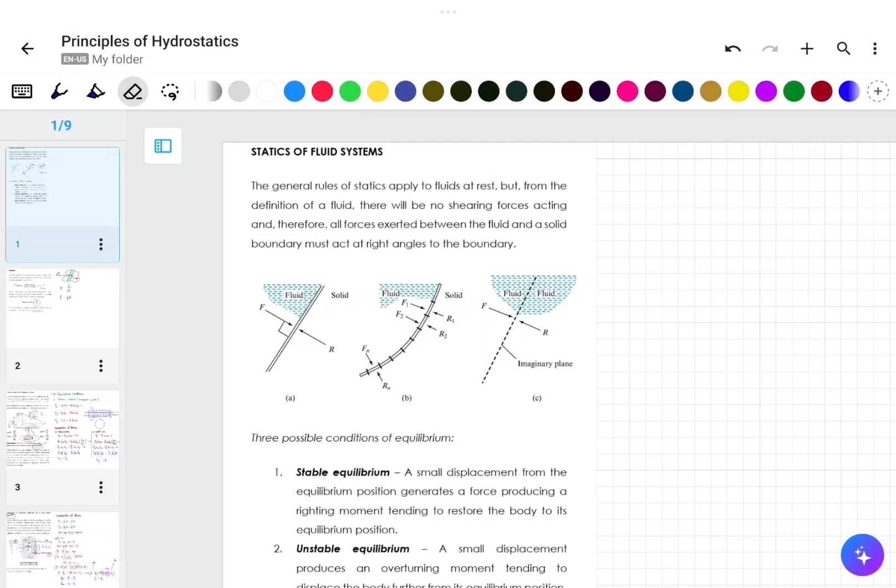So for today, we're going to discuss the statics of fluid systems under principles of hydrostatics. The general rule of statics applies to fluid at rest, but by definition, fluid is a substance that continues to deform under the action of shearing forces. In this case, there will be no shearing forces acting, and therefore all forces exerted between the fluid and solid boundary must act at right angles to the boundary. Why is that? Because we want to have a body which is at rest.

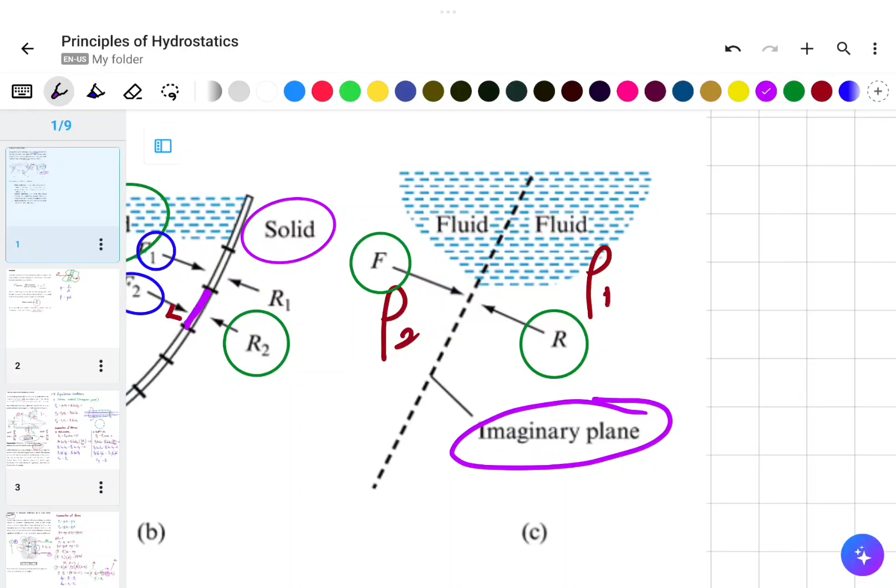Okay, so we will continue our discussion.

So now let's proceed with three possible conditions of equilibrium. A while ago, we discussed the possible scenarios for forces. Now let's discuss these possible conditions of equilibrium.

First, we have what we call stable equilibrium. A small displacement from the equilibrium position generates a force producing a righting moment tending to restore the body to its equilibrium position. So it's like this.

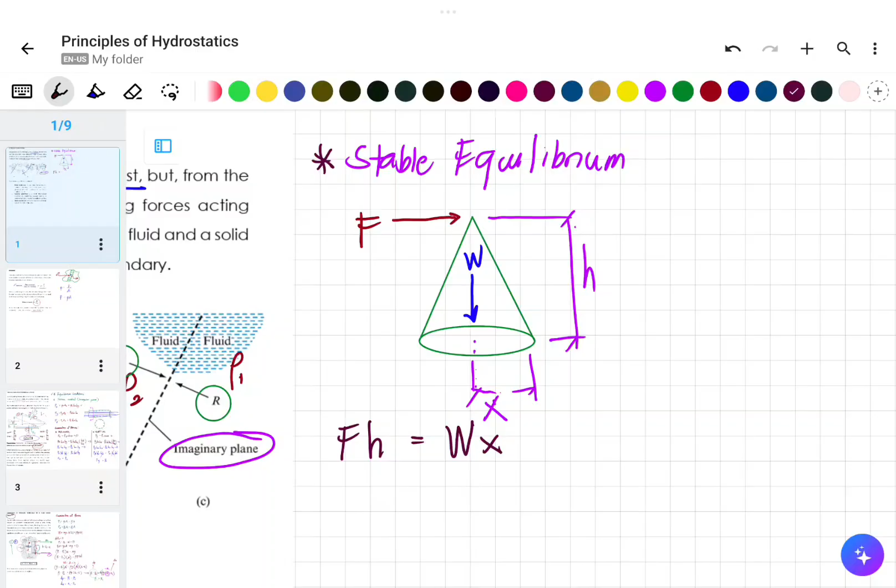Next, let's have what we call unstable equilibrium. A small displacement produces an overturning moment tending to displace the body further from its equilibrium position. So let's have that.

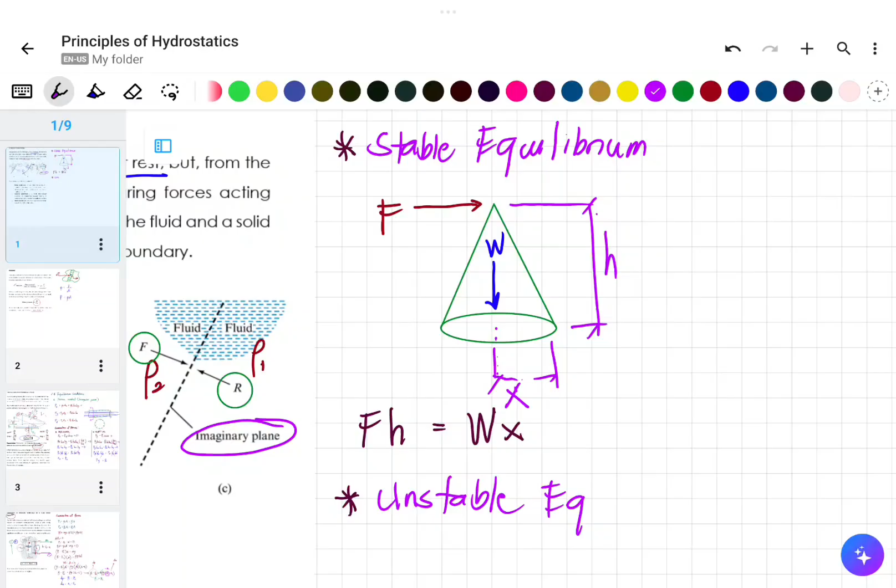For example, this is your cone. And then, of course, there's a force that will act on the body. There's still a weight. And then, same, we have our distance, x, and then height, h.

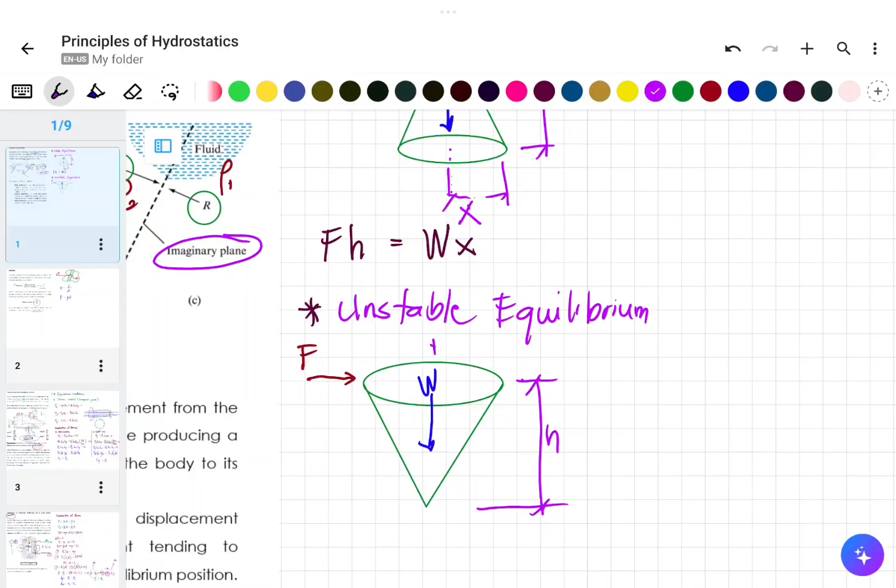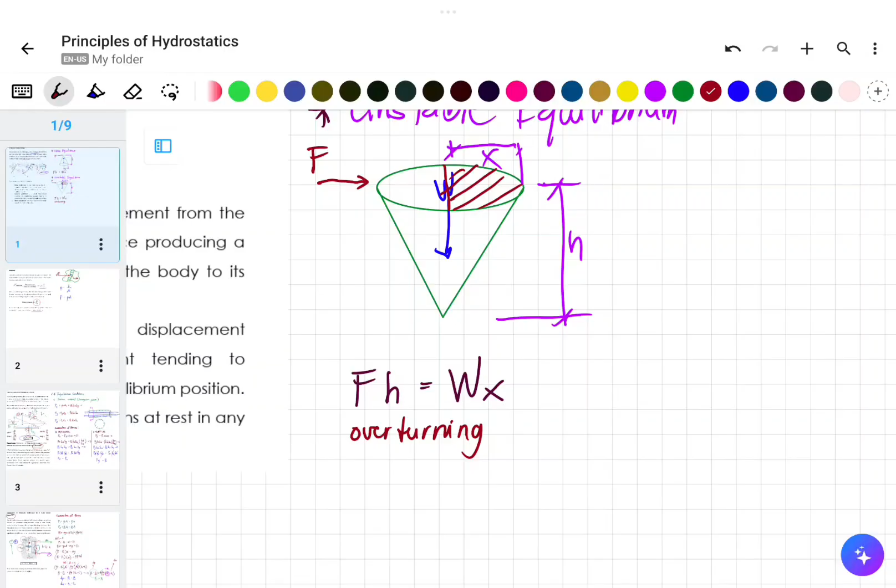As noted there, the displaced body tends to displace further from its equilibrium position, it won't go back. And then our last topic, our so-called neutral equilibrium.

So, neutral equilibrium. Let's say this is our cone again, but this time it's lying down. For example, like that. For example, this is our cone.

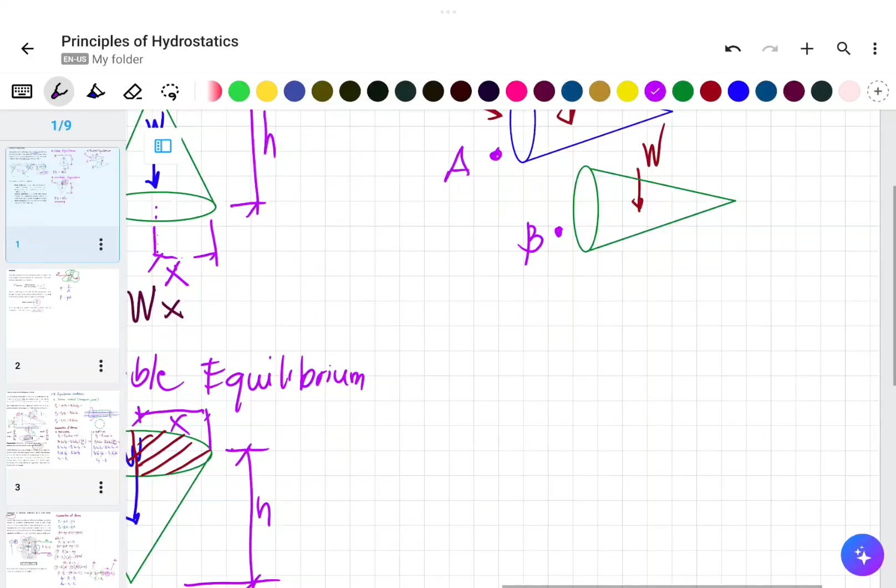That's why it's neutral. The body remains at rest in any position to which it is displaced. It's only displaced, so we have a displaced position. So this is our displaced position of the body.

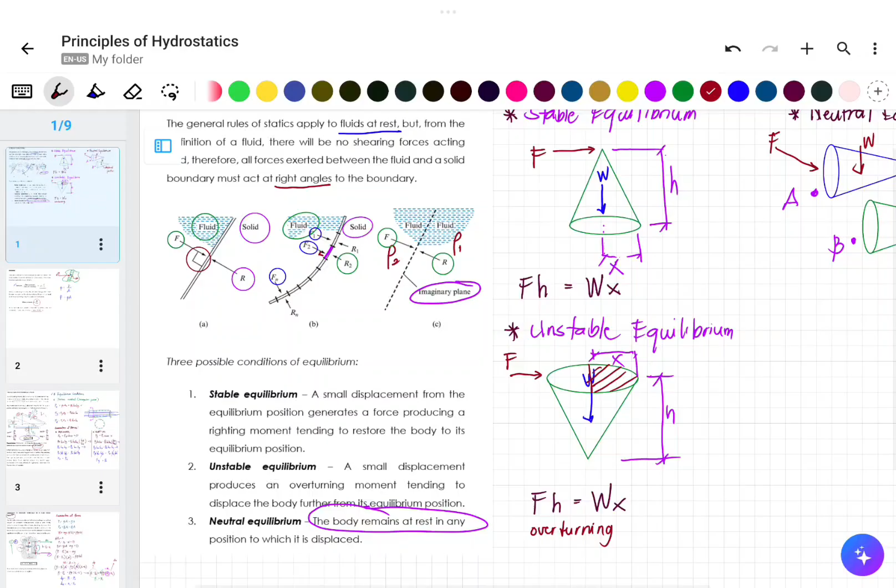Okay, so that is the three conditions or possible conditions of equilibrium, in relation to our static forces or pertaining to fluids at rest. That's why we're discussing equilibrium. Okay, so that's the three possible conditions.

First, stable equilibrium: a small displacement from the equilibrium position generates a force producing a righting moment tending to restore the body to its equilibrium position. Second, unstable equilibrium: a small displacement produces an overturning moment tending to displace the body further from its equilibrium position.

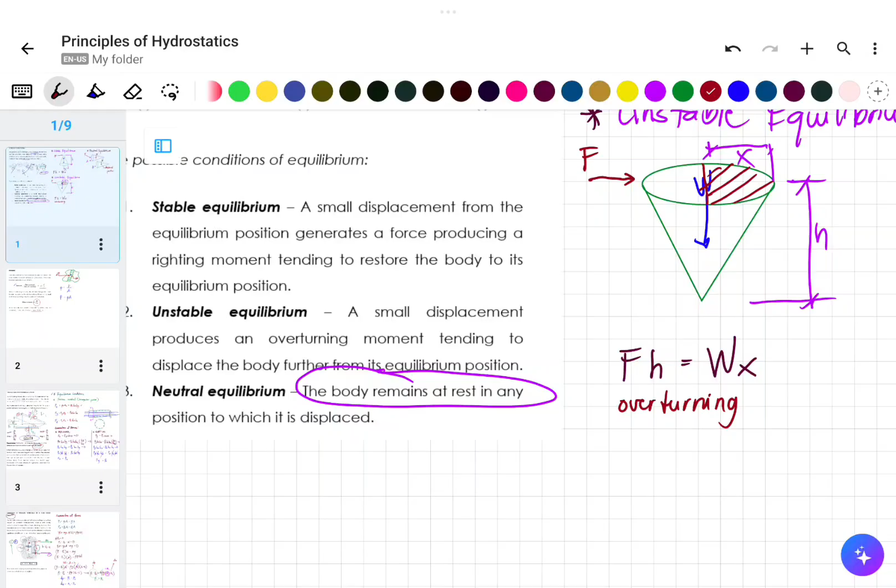That's right, like this, it will really topple over. And neutral equilibrium is when the body remains at rest in any position to which it is displaced. Okay, so that's our three possible conditions.

So now let's talk about pressure. Pressure is defined as the force exerted per unit area. If the force exerted on each unit area of a boundary is the same, the pressure is said to be uniform, similar to earlier. So if that's uniform, or the same, our pressure is uniform.

So in this case, this is our equation: P is equal to F over A. Therefore, it follows that if we want to compute for the force, that is pressure times area. So that is for our calculation.

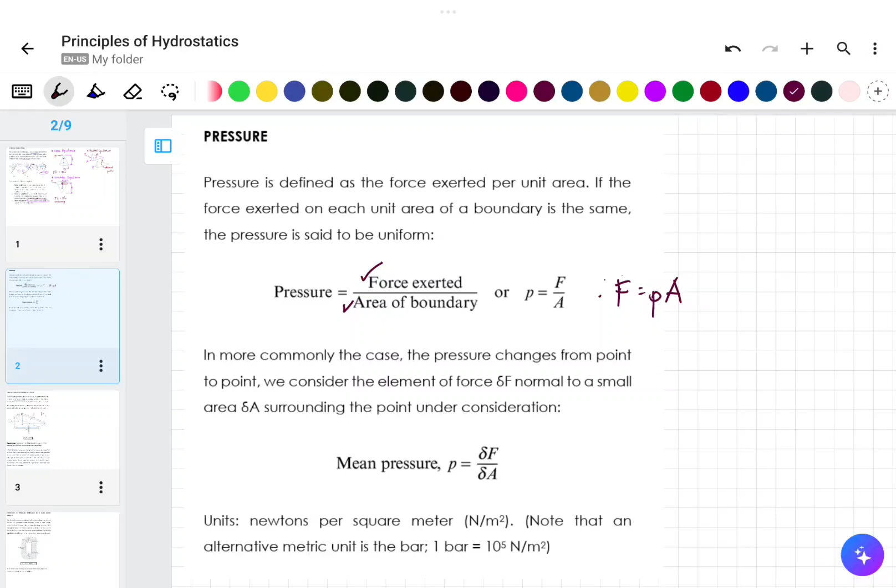In more common cases, the pressure changes from point to point. We consider the element force delta F normal to a small area delta A surrounding the point under consideration. So this is where mean pressure, the average, comes in. For mean pressure, let's say this is the body we're considering.

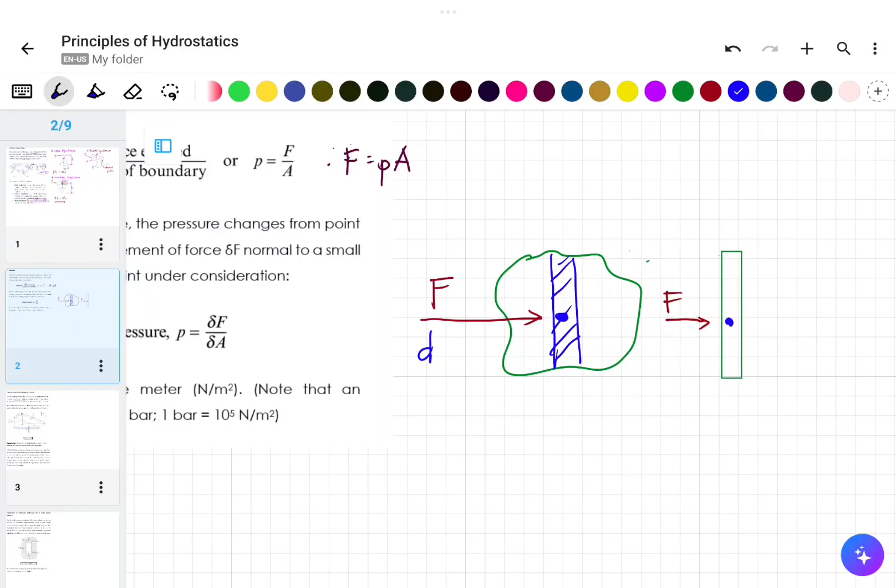So units for pressure is Newton per square meter, it can also be pounds per square foot, or the more commonly used one is bar when the value of pressure gets high, which is 100,000 Pascal. 1 bar is 10 raised to 5 Newton per square meter. Okay, so that's for the value of pressure.

Now let's talk about Pascal's law for pressure at a point, by considering the equilibrium of a small fluid element in the form of a triangular prism, as shown in the illustration. This triangular prism surrounds a point in the fluid, and a relationship can be established between the pressure P sub x in the x direction, P sub y in the y direction, and P sub s normal to any plane inclined at angle theta to the horizontal, at this point in the z direction.

So the relationship that can be formed is this: P sub s equals P sub x equals P sub y. That is what we call Pascal's law. Pascal's law indicates that the pressure at a point is the same in all directions and applies to fluid at rest.

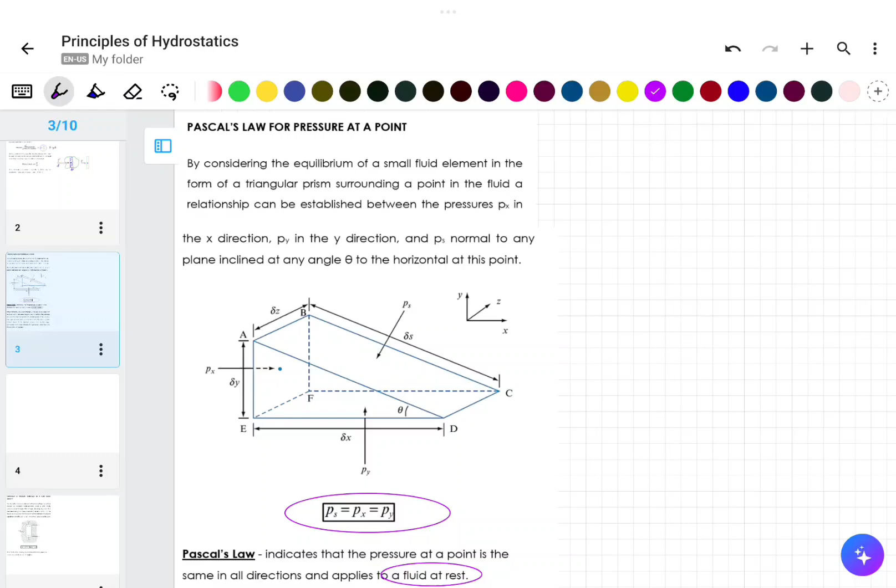Take note, fluid at rest - that's what we're discussing. So for us to understand how these three pressures are equal, let's consider this triangular prism. First, what condition must be satisfied? It should be fluid at rest, or equilibrium.

So we have this equilibrium condition. When we say equilibrium, our forces should sum up to zero. So when we sum the forces, it equals zero, regardless of direction.

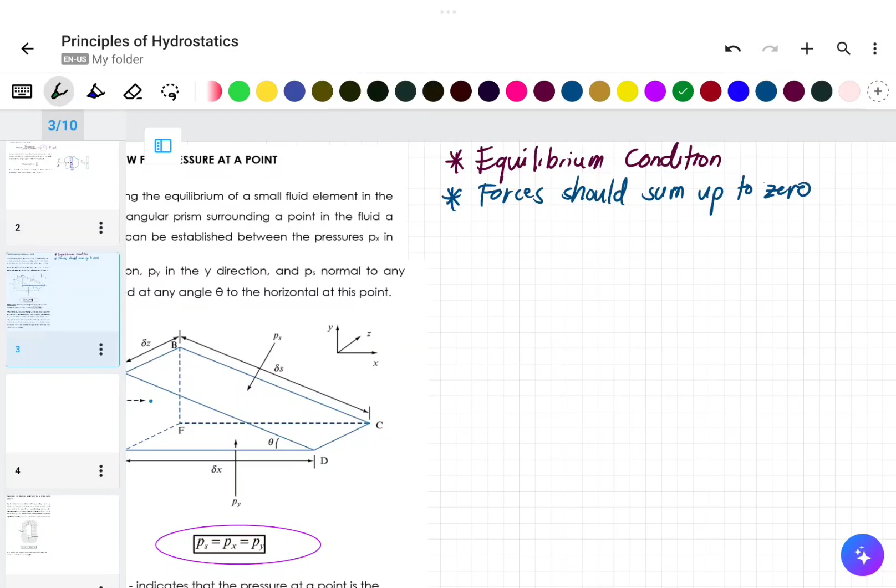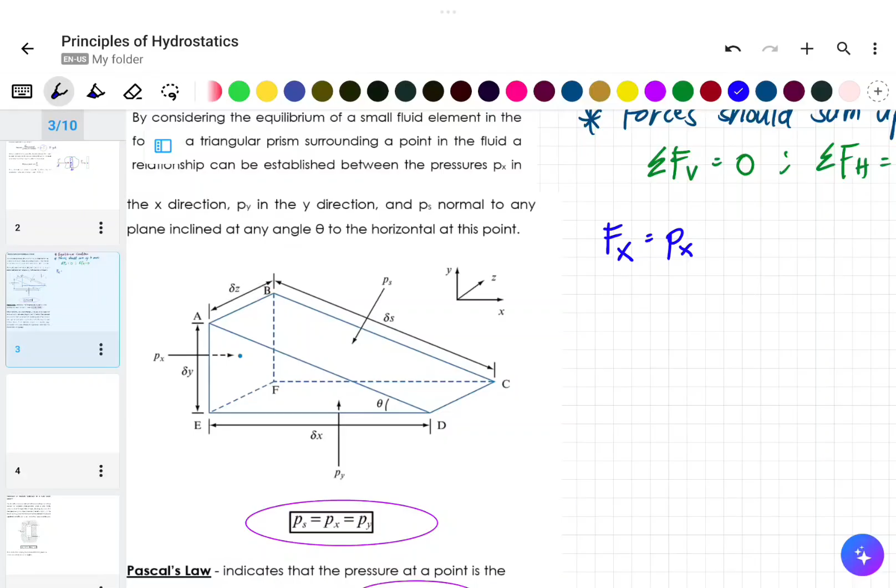So we have force along X. What is that again? Force using pressure times area. That is P sub X, pressure along X, multiplied by area of X. The area along X, as you can see, is delta Z multiplied by delta Y. So that is P sub X times delta Z times delta Y.

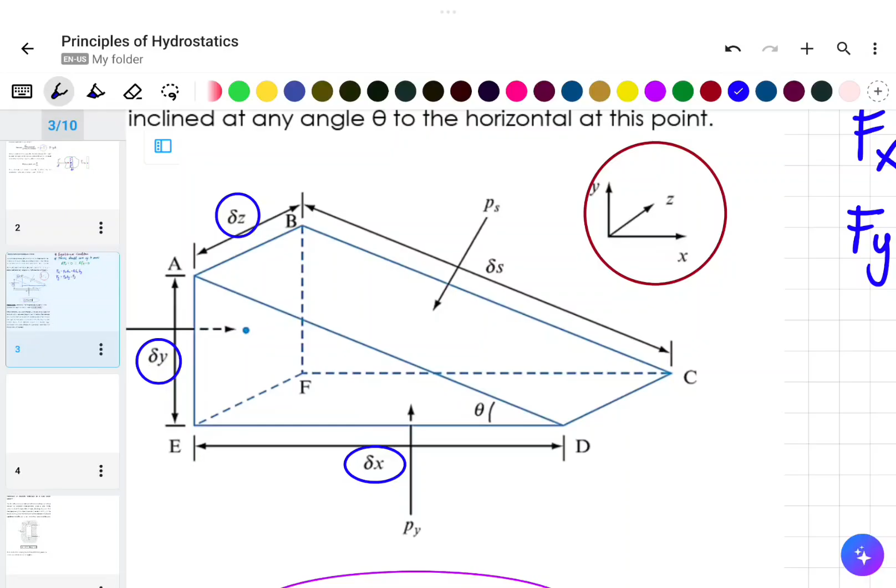We also have force along Y, that is pressure sub Y times area of Y. What is the area of Y? Looking at the guide on the side, going upward - that dimension you see is delta X and delta Z.

And then we have the force along the z-axis. That is P sub S, since that's labeled S, times area along z. What is the area along z? It's inclined - that is delta z multiplied by delta S. So these are the three forces.

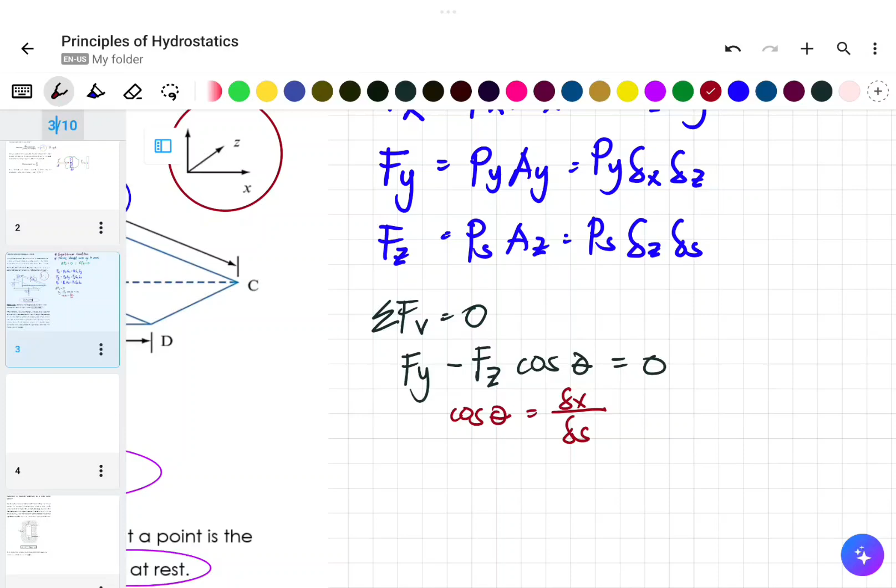Let's substitute. That is P sub Y times delta x delta z, minus P sub S times delta z delta s, times cosine theta which is delta x over delta s. So we can cancel out the delta s terms. What's left is P sub Y delta x delta z minus P sub S delta z delta x equals zero.

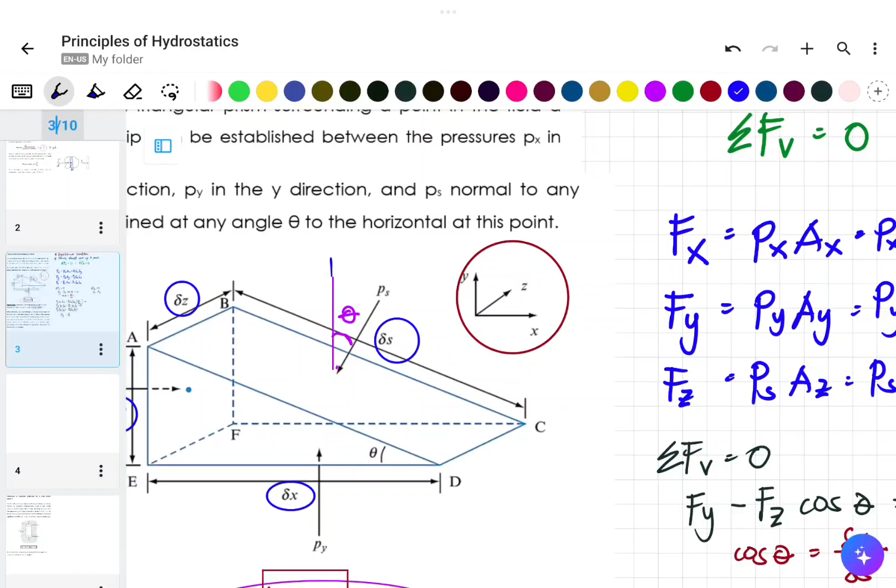But sine theta is equal to, so tingin tayo ulit dito sa triangle na to, triangle AED, kasi din natin kinuha yung ating cosine theta. Kung ang cosine ay adjacent over hypotenuse, malamang ang sine ay opposite over hypotenuse. That is delta Y over delta S.

P sub X delta Z delta Y, yung ating F sub X ito, minus P sub S delta Z delta S. Sin theta is delta Y over delta S. So, pwede nating makancel pala yung ating delta S din to.

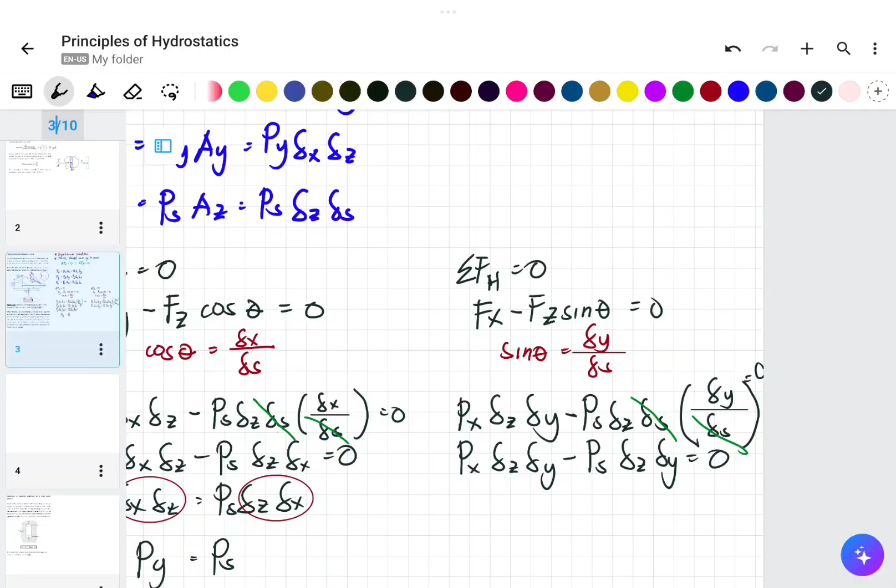Simplifying further, P sub X delta Z delta Y is equal to P sub S delta Z delta Y. Dahil nga pareha sila meron ito, we could factor that out. And ang may iwan is P sub X is equal to P sub S. So equal din, that means ito ay tama.

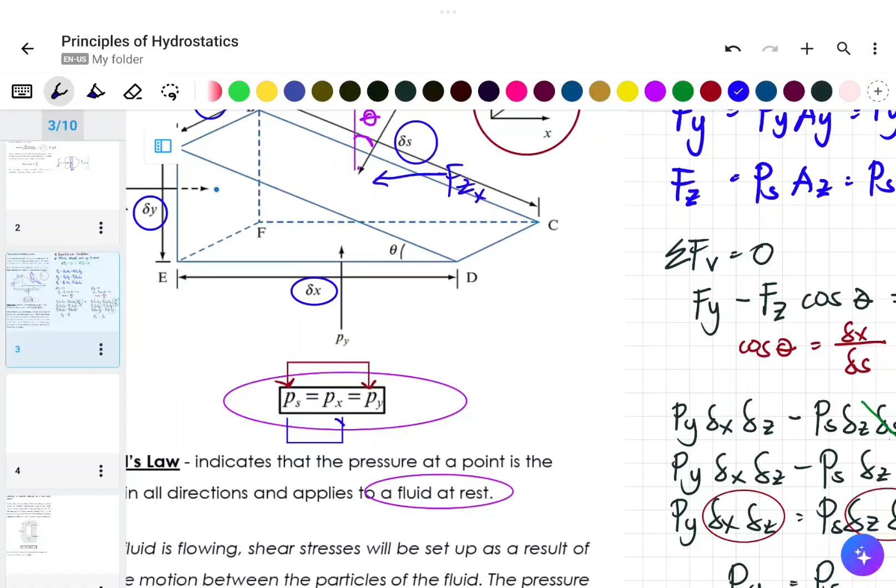Yan, pareha sila. So it follows na tama ang Pascal's law using this prism or illustration. Equal, parehas na parehas.

So anong ini-indicate ito? It indicates that if the fluid is flowing, shearing stress will be set up as a result of relative motion between particles of the fluid. Kaya nga, pag titignan natin to, ang consideration natin, fluid at rest. Ngayon, applicable to, itong Pascal's law na to, given na fluid at rest tayo.

However, kung nagpo-flow, which is on the actual, diba? O let's say ito yung ating actual flow, or nagpo-flow tayo. Halimbawa, nagpo-flow yung fluid.

Yun yung sabi, no? If the fluid is flowing, the shearing stress will be set up as a result of the relative motion between the particles of the fluid. The pressure at a point is then considered to be the mean of the normal forces per unit area, or stresses on three mutually perpendicular planes.

So titingnan natin kung saan siya tumatama, parang ganon no, yung result. Since these normal stresses are usually large compared to shearing stresses, it's generally assumed that Pascal's law still applies.

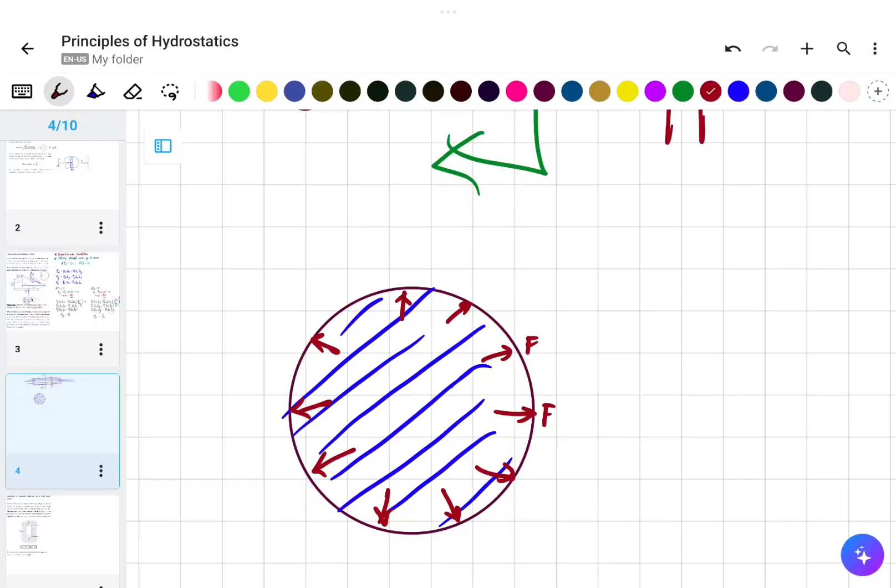So lalabas na meron tayong mga maliliit na forces, and it acts perpendicular to that boundary. Yun yung sinasabi dito na, ayan, kapag nagpo-flow daw, mas mataas pa rin yung mga normal stresses, especially kung nagpo-flow yan to a pipe, no?

Siyempre yung consideration yan. So kung bubuuin natin yan, meron pa yan dito na, let's say ito. So meron yan dito na along X, o along to the normal, diba, pag ganyan, ganito, tsaka pag ganito. So kung nagko-flow, ganyan na ang behavior. So tatama pa rin yan, at magkakaroon pa rin tayo ng normal stresses, not just shear, no?

Ito yung effect ng kapag tumataas na yung ating pressure sa loob. Diba? Nalala niyo yung ating discussion ng cavitation and vapor pressure. Kapag tumaas na, para na siya mag-escape. Ito na yon, no? Kung nag-increase yung temperature during the flow, malamang ganito ang magiging behavior niya.

Okay? So that's what etong paragraph na to indicates, no? Kapag gumagalaw, kasi we are dealing with fluid at rest, pero kung gumagalaw yon, no? Dahil nga yung ating kino-consider pa rin natin na at a point, no, yung mean normal forces per unit area, yun nga yung kumukuha tayo na strip and then analyzing those strips to a certain length, mas mataas pa rin yun compared to shearing stresses.

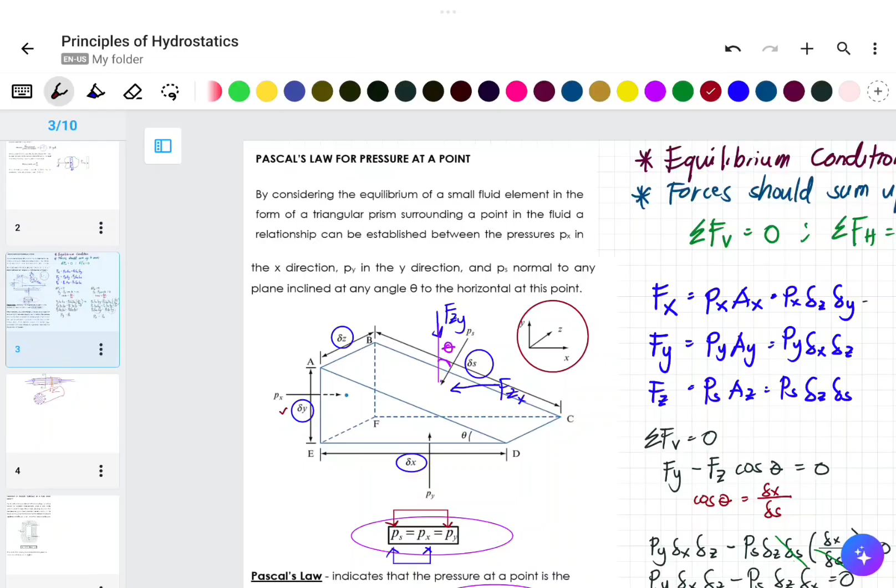Now let's proceed with the variation of pressure vertically in a fluid under gravity. Remember, we are dealing with a fluid under gravity, so we will consider our gravitational constant.

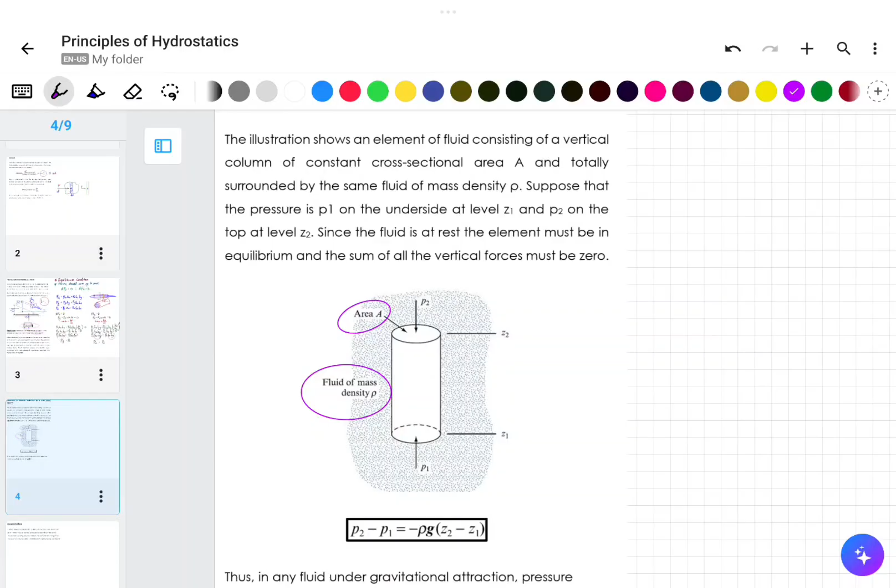Suppose that pressure P sub 1 is on the underside at level Z sub 1, and pressure P sub 2 is on the top level Z sub 2. This is P sub 1 at the bottom, which is Z sub 1.

Since the fluid is at rest, the element must be in equilibrium and the sum of all vertical forces must be zero. That's what we consider, and that's how it turns out in our problem.

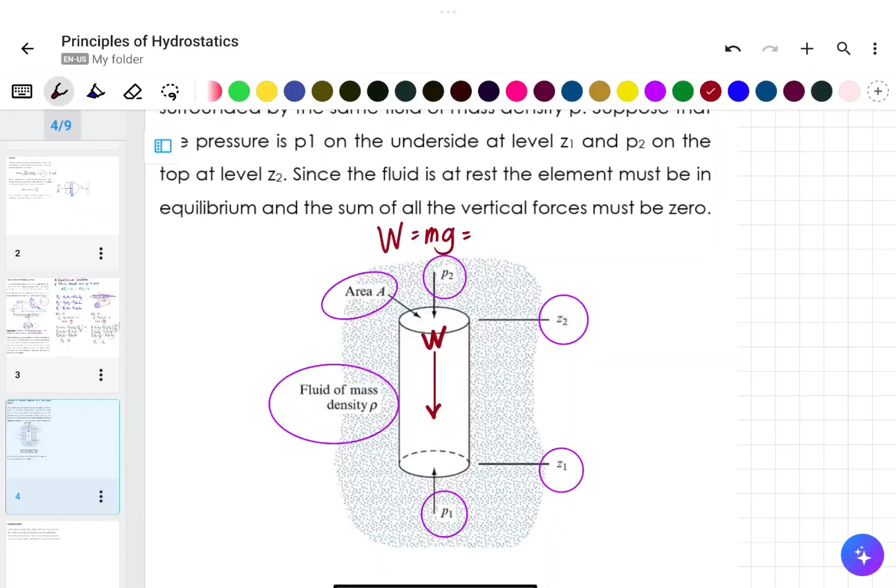Or we know from our fluid property that this is gamma multiplied by the volume, or rho g multiplied by volume. That's our consideration if this is the case.

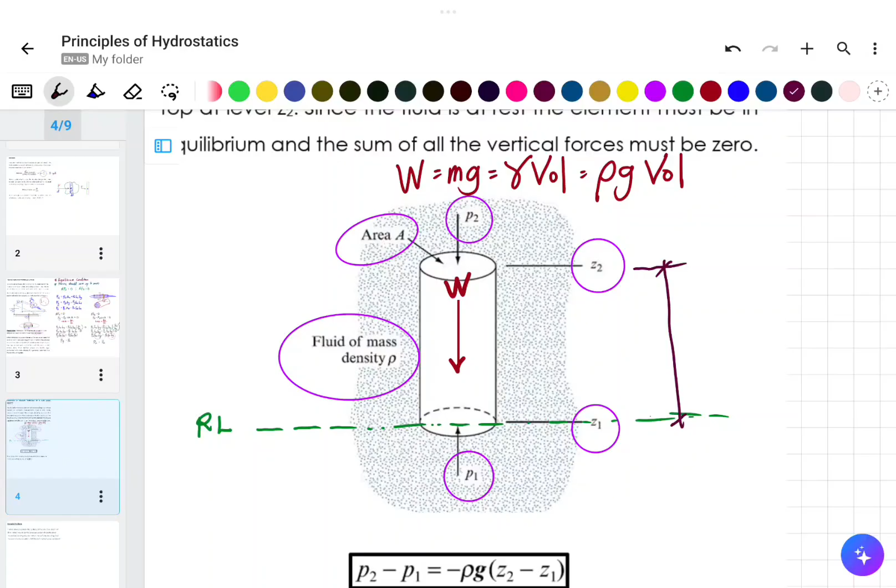Now, since the fluid is at rest, the element must be in equilibrium and the sum of all the vertical forces must be zero. All forces are vertical since we have no horizontal forces. So if that's the case, this is how it should turn out - let's check if that's true.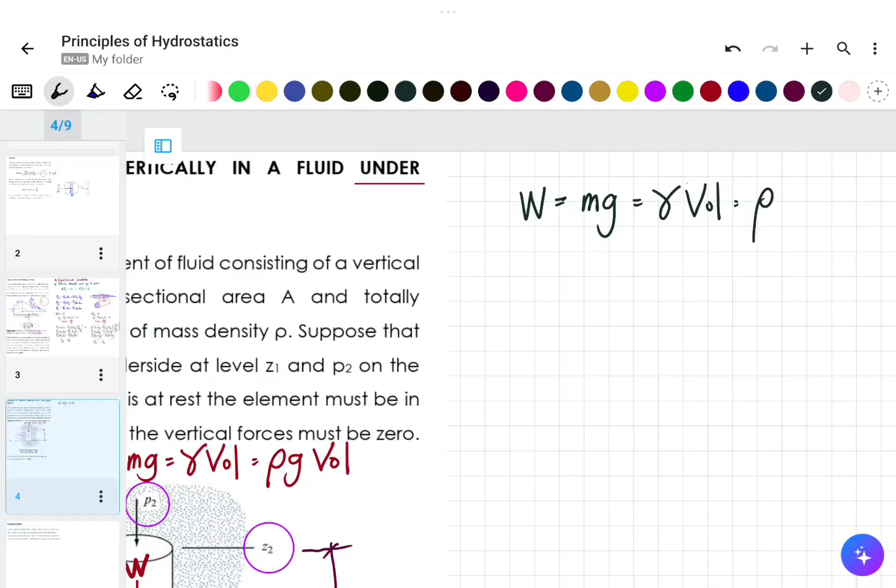Let's go one by one. What are the vertical forces? First, caused by the weight - that is mass times gravitational constant, or gamma times volume, or rho g times volume.

That's the first one. Next, the force caused by pressure 1, that is P sub 1 times area, since the cross-sectional area is constant throughout. Therefore, F sub 2 is pressure sub 2 times area.

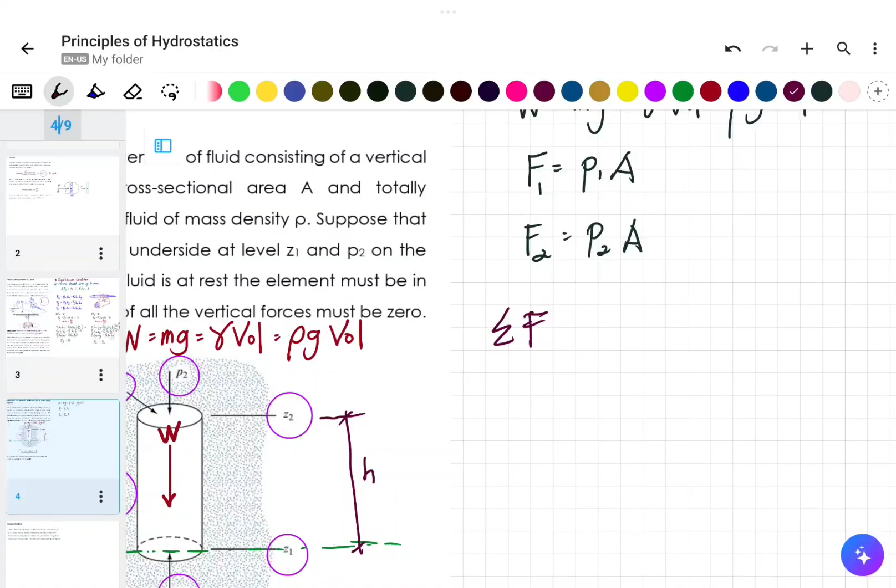So now what do we do next? Let's sum up the vertical forces equal to zero. What's our expression? All forces going up are positive, all forces going down are negative. So F sub 1 is upward. F sub 1 minus F sub 2 minus weight is equal to zero.

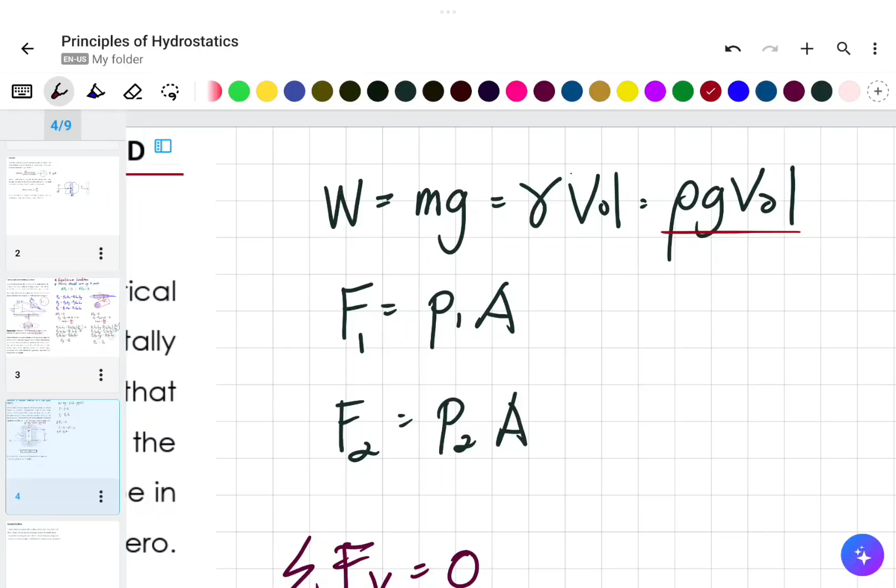So what is our F sub 1? That is P sub 1 A minus P sub 2 A, minus - since we're using area, let's use the one with volume. We can use gamma volume or rho g volume. But because we want to emphasize the action of gravity, let's use this one with the gravitational constant - minus rho g volume is equal to zero.

So that is P sub 1 A minus P sub 2 A. Let me move the rho g volume to the other side. So I can factor out the A: A times (P sub 1 minus P sub 2) is equal to rho g volume.

What is the volume? So rho g, volume is area times height. If that's the case, we can cancel out the area - that's the cross-sectional area - times this height h, which is why I wanted to get the height h earlier. So we can cancel the A. What's left is P sub 1 minus P sub 2 is equal to rho g h.

So now, since we know that our height is caused by - if this is our reference line that we assumed earlier - everything lower is negative, everything higher, I should say everything above, is positive.

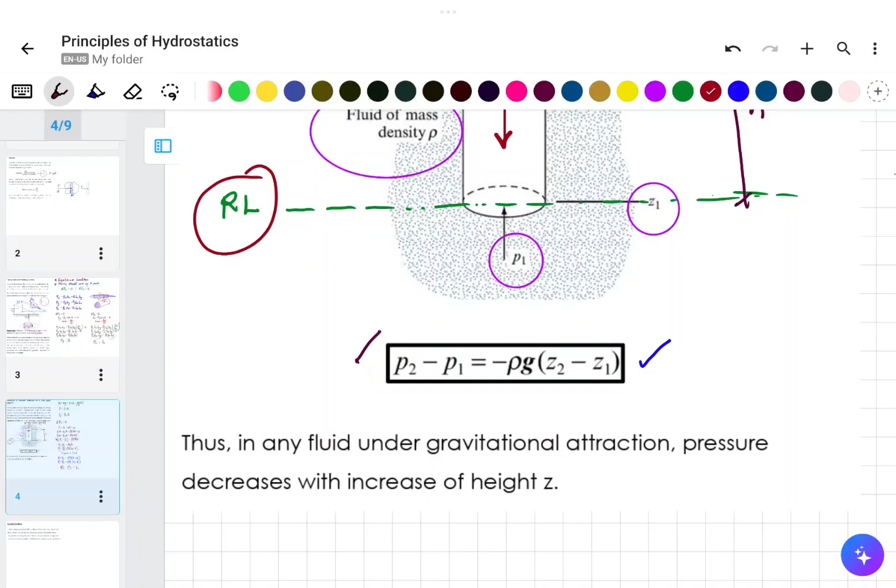Thus, in any fluid under gravitational attraction, pressure decreases with the increase of height Z. So as height increases, pressure decreases. Since we assumed P sub 1 is higher, this is the correct result when reversed. This is why it's better to use this formula, considering that as pressure increases, height Z decreases. We assume P sub 2 is lower, so Z sub 2 must be higher on the other side. That covers the vertical variation of pressure in a fluid under gravity.

To understand this better, let's answer this sample problem. A diver descends from the surface of the sea to a depth of 30 meters. What would be the pressure under which the diver would be working, above that at the surface, assuming that the density of seawater is 1025 kg per cubic meter?

So there's seawater, let's say this is it. This is the surface of the seawater. Now there's a diver who will descend to a depth of 30 meters, as stated in the problem. Let's say this is the diver, a stickman, who will descend 30 meters.

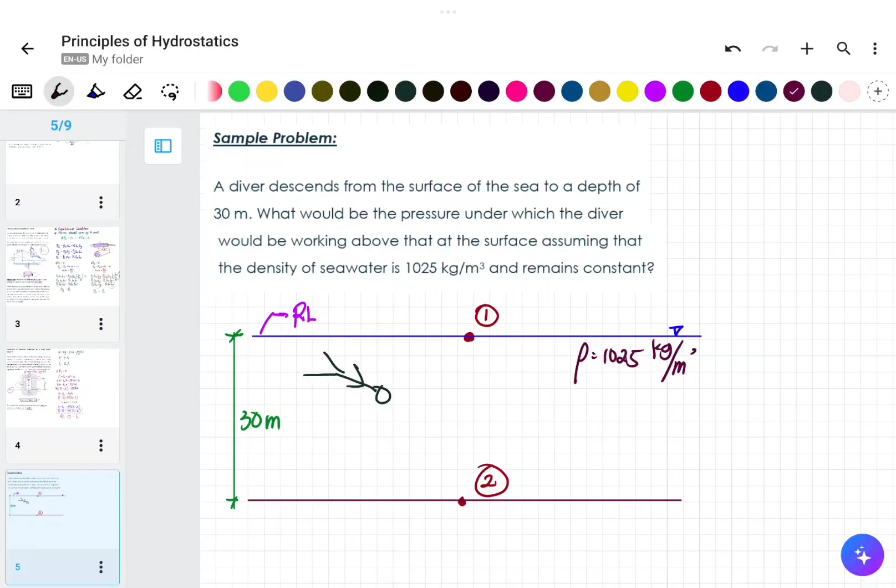So given that, what is being asked is: what will be the pressure under which the diver would be working above that at the surface, assuming the density of seawater given is 1025 kg per cubic meter and remains constant. It's said that even as it gets deeper, the density stays the same. So let's use this formula.

Ulit yan. P sub 1 minus P sub 2 is equal to negative rho g times Z sub 2 minus Z sub 1. Sabi natin, ang difference ng height or h ay ito because of this elevation. Hindi ba ito rin yun? Yung ating h na yan, so this is our h. So i-rewrite natin: P sub 1 minus P sub 2 is equal to negative rho g h.

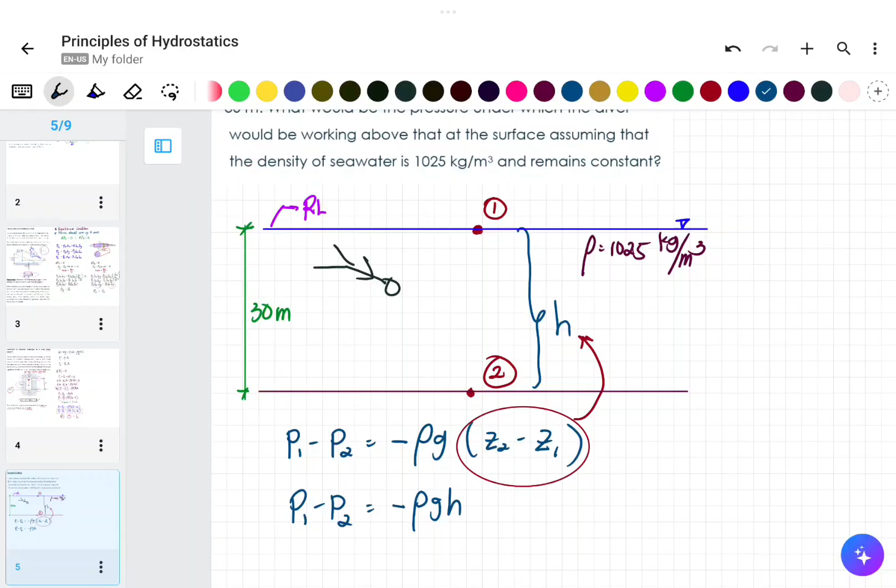Dahil bumababa tayo, P sub 1 minus P sub 2 is equal to negative rho natin, 1025 kilogram per cubic meter, multiplied by 9.81 meter per second square, times ano yung h? Since pababa tayo sa ating reference line, this h is a negative value, negative 30 meters. And the answer is a positive value. Positive ang lalabas sa sagot, that is 301.7 times 10 cube. So kung hindi pa ito kinonvert, kung diretso, ito magiging Newton per square meter, or Pascal, or 301.7 kilopascal. So that is the answer for that problem.

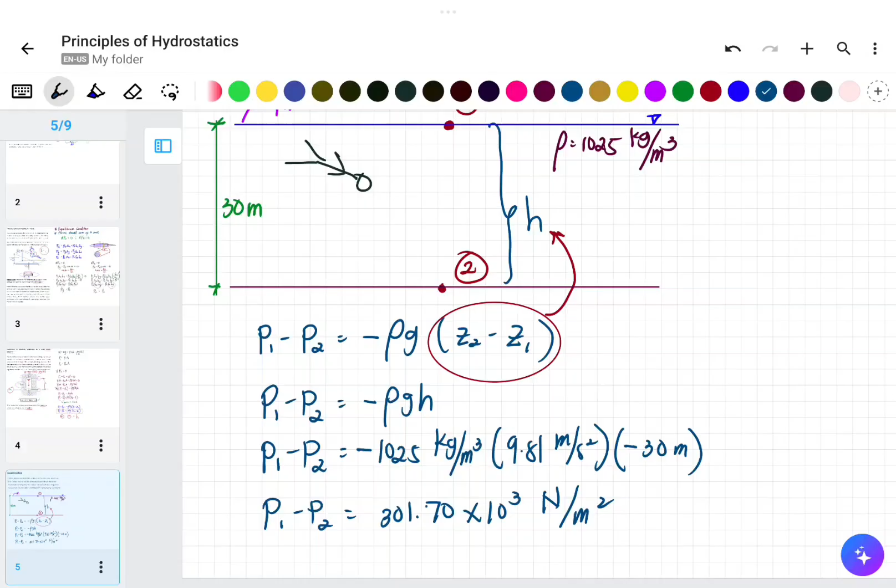Ngayon, kung merong nagkaroon ng deflection o nagkaroon ng parang pagtigil at nagbago yung kanyang height, let's say halimbawa ang scenario ay bumaba siya at this level, let's say ito yun, o kung meron man yung distance na z, tapos umakyat siya to a certain level, tapos bababa ulit, mababago yung pressure na kailangan niyang i-work out. So mag-iiba-iba yung value, considering na constant pa rin yung ating density. Kung nagpapalit yung density, malamang mag-iiba pa rin yung value na ating ina-analyze. So that's it for the variation of pressure vertically in a fluid under gravity.

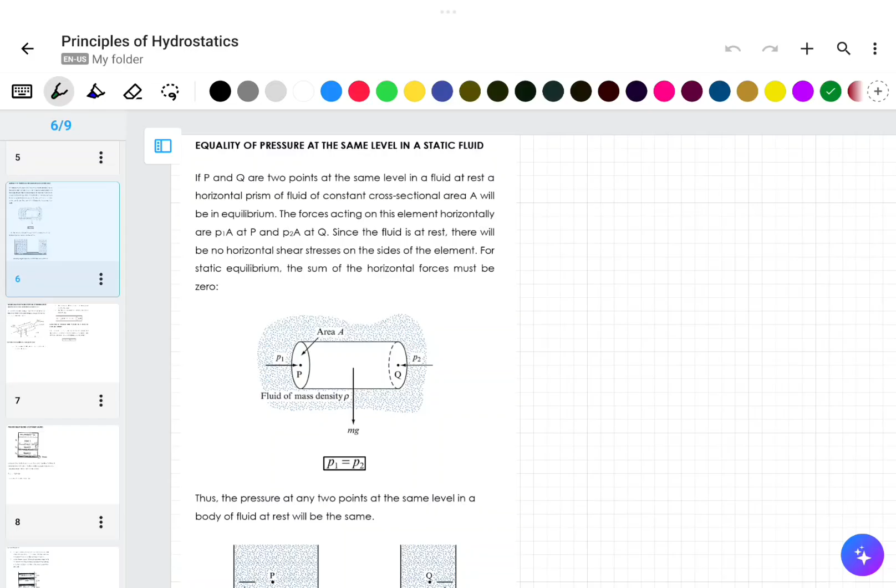Now let's discuss the equality of pressure at the same level in a static fluid. So when you say equality, from the term equal, it's safe to say that the values or the forces, the amount of forces, are the same, given that they are on the same level. Just like this one, if P and Q are 2 points on the same level, so zoom natin ng konti. Ito daw yung ating, okay, point P at point Q ay nasa isang level.

A horizontal prism of fluid constant cross-section area will be in equilibrium, kasi nga naman it will produce the same forces. So that is caused by P sub 1, which is on the cross-sectional area A, and P sub 2 on the other hand, with a cross-sectional area A. Therefore F sub 1, which is equal to P sub 1 A, is equal to F sub 2, which is equal to P sub 2 A. Since the fluid is at rest, there will be no horizontal shearing stresses on the side of the element. For static equilibrium, the sum of the forces will be equal. So kung pare sila ng cross-sectional area, maka-cancel out yung mga cross-sectional area at magiging ganito na.

Wala na tayong weight? No, ito, this is weight, diba? Wala na kasi wala naman tayong vertical force maliban sa weight, so hindi na natin makakasama yan sa consideration natin ng equality ng pressure kapag horizontal. Thus, the pressure at any 2 points on the same level in the fluid at rest will be the same. Kung continuous yan, tulad nito, like this one, yung P natin at yung ating Q ay on the same level, yung ating R at S on the same level. So if that's the case, we could say that the pressure at P is equal to the pressure at Q, while the pressure at R is equal to pressure at S. So ayan yung ating tinatawag na continuous body of a fluid.

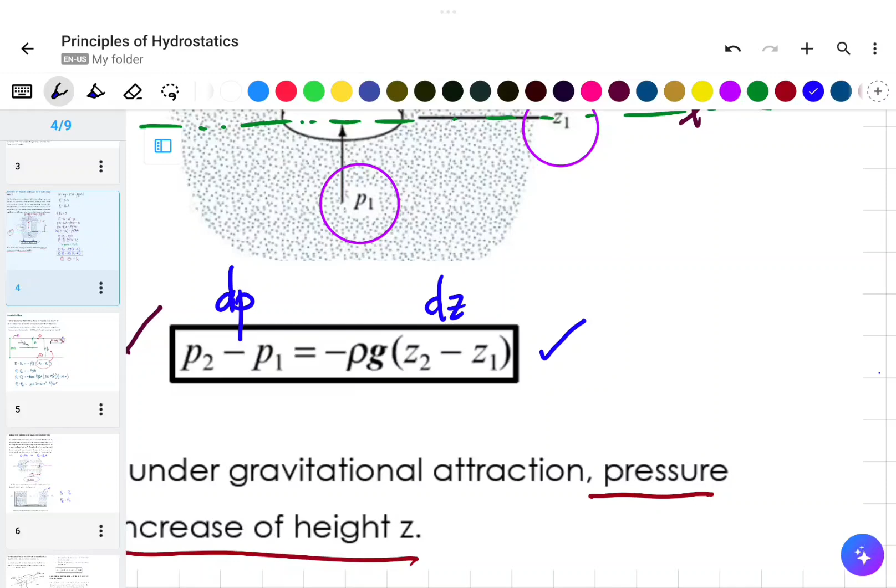Galing yan dito. So, yung ating ito, this is your dP. And this portion is yung inyong d sub z. So, kung aayusin nyo yan, lalabas na dP over dz is equal to negative rho g. Ito rin yun. Ito yung pinag-uusapan na yun.

Ngayon, taking into account yung difference ng elevation, magiging ganito na yan. Yung nakikita nyo sa baba na ginamit ito ng integral if hindi siya constant yung kanyang pag-change ng elevation. Kung mayroong strip or consideration lang, kung itutuloy yan, babalik lang din yan dito. Ito, ay magiging ganito pa din.

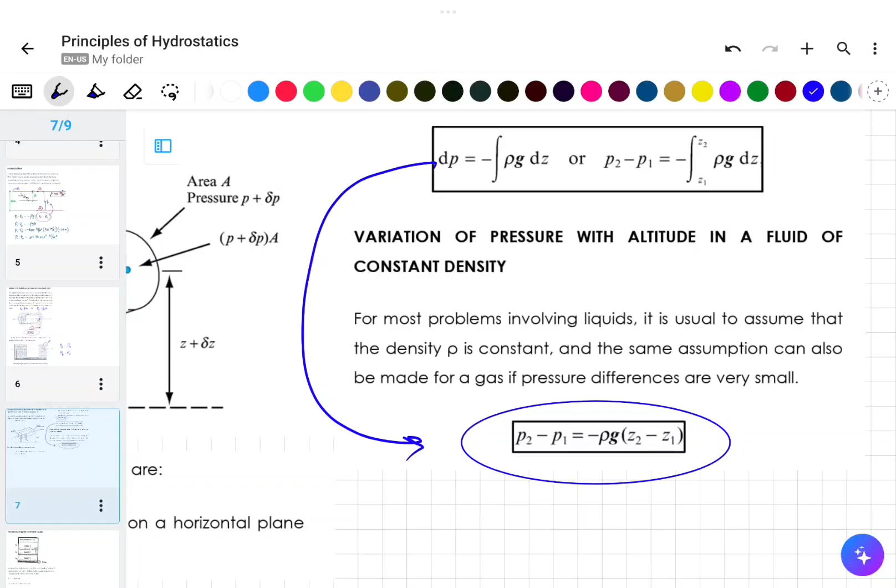For most problems involving fluids or liquids, it is usual to assume that the density rho is constant. Nagbabago lang naman yan because of the density. Kapag hindi constant ang density, pwede magpalit-palit talaga yung height. So, the same assumption can be made for gas if pressure differences are very small. Yung gases, hindi natin pag-uusapan. We're going to focus muna sa liquid. Yun yung ating consideration.

Hindi ko na masyadong mapahabain kasi nga, we've discussed yung mga unang portion which is yung kung vertical siya or naka-horizontal siya. Same yung concept nun. That's for the general equation ng variation of pressure due to gravity from point to point in a static fluid. Okay, so now let's talk about pressure below layers of different liquids.

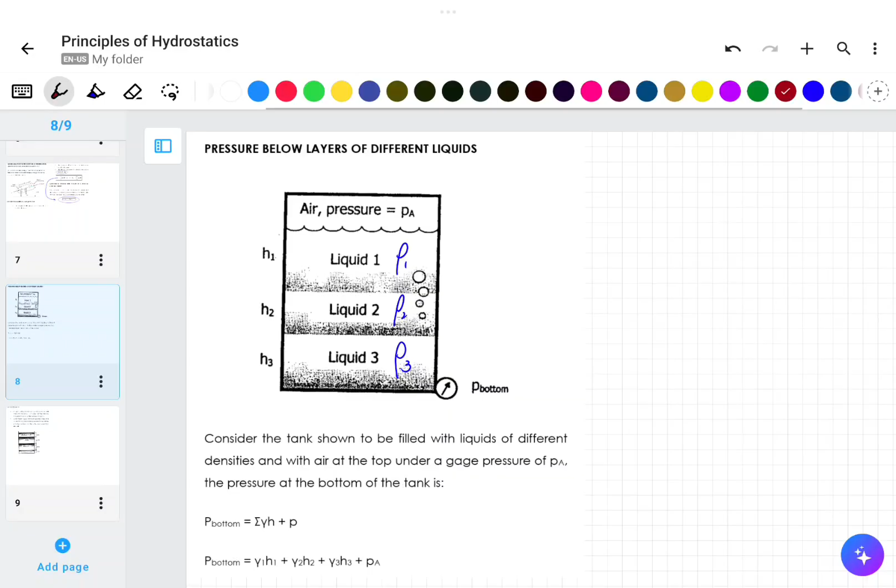So, in this topic, now we're going to talk about what if the fluids, or the liquids in general, are placed in a container. Iba't ibang liquid. So, in this case, may liquid 1, liquid 2, and 3. Malamang meron silang kanya-kanyang density. Kung may kanya-kanyang density, possible, may kanya-kanya silang unit weight. Kapag ganito, yung ating scenario, let's have an assumption.

We have our assumption sa ating ganitong klase ng scenario. First is, lahat ng pag-sum natin ng gamma times h, gamma times h is positive if it is read downward. Second assumption, gamma h is negative kung binabasa natin siya ng pataas. Yun yung mga assumption natin.

So, i-consider natin itong tank na to. Gamit natin itong assumption natin na to, na kapag yung gamma H binasa mo positive, pababa. At kapag yung gamma H binasa mo negative, kapag binasa mo siya pataas. So, let's have this.

Consider the tank shown to be filled with liquids of different densities and with air at the top under a gauge pressure. Take note, ang ginamit na term is gauge pressure, measured pressure to. Kung binigyan kayo ng absolute pressure, you have to convert it into gauge pressure muna. Of P sub A, then the pressure at the bottom of the tank is, kung gauge pressure to, take note ng sinabi.

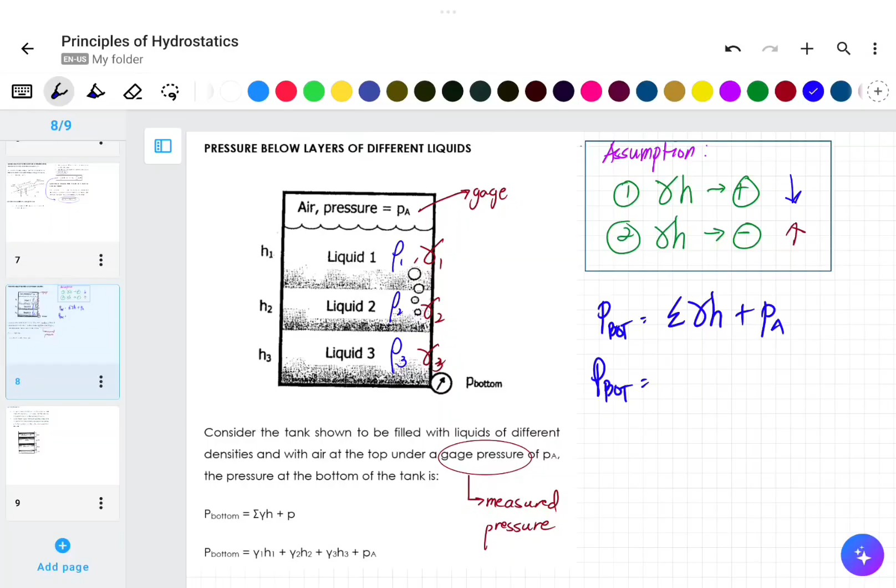Sabi natin, kung meron tayong dalawang points, let's say ito yung point 1 at point 2. Ito na, point 1, ito yung point 2. So, if this is your point 1, point 2, and this is your H, if meron kang given na gamma na liquid, para makuha yan, that the difference in pressure, nakikita nyo, same na same. P sub 2 minus P sub 1 is equal to, ano ba itong rho G? Gamma. Pero in this case, negative. Negative. Negative gamma. And this Z sub 2 minus Z sub 1, ito yung ating H.

Pero take note kung paano natin binabasa ulit yon. Sabi natin, parang mas mataas yung binabasa natin yung H, pagpababa, positive. So, mababago yung sign natin. Pressure sub 2 minus pressure sub 1 is positive gamma H.

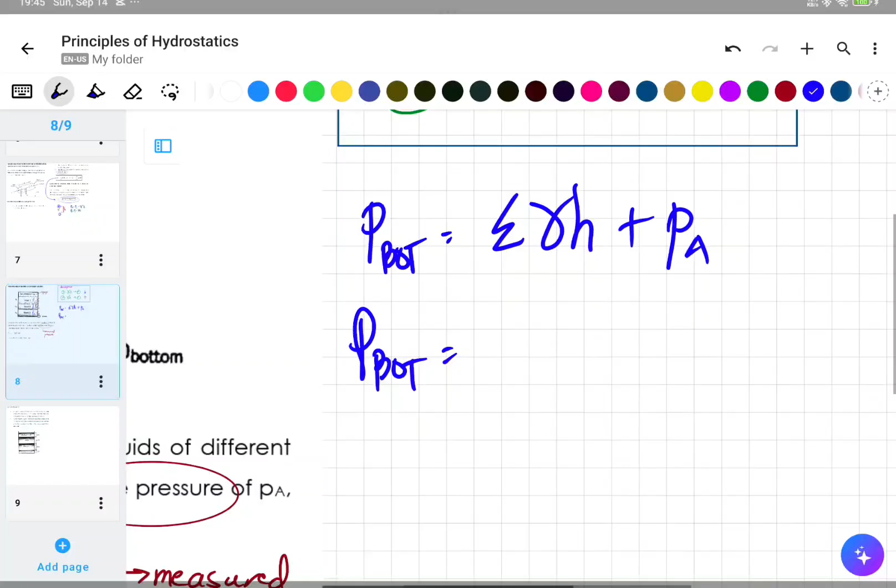Ito yung tinutukoy natin dito. Kapag sinum natin yung pressure at the bottom, this is equal to gamma H sub 1 plus gamma H sub 2, depende sa liquid, plus gamma H sub 3 plus P sub A. That is the pressure at the bottom. Take note, gauge pressure yan. Kung mas maraming liquid, mas marami yung sinasum natin na gamma H. Saan galing yon? Dito. Rho G is gamma, at Z sub 2 minus Z sub 1 is H.

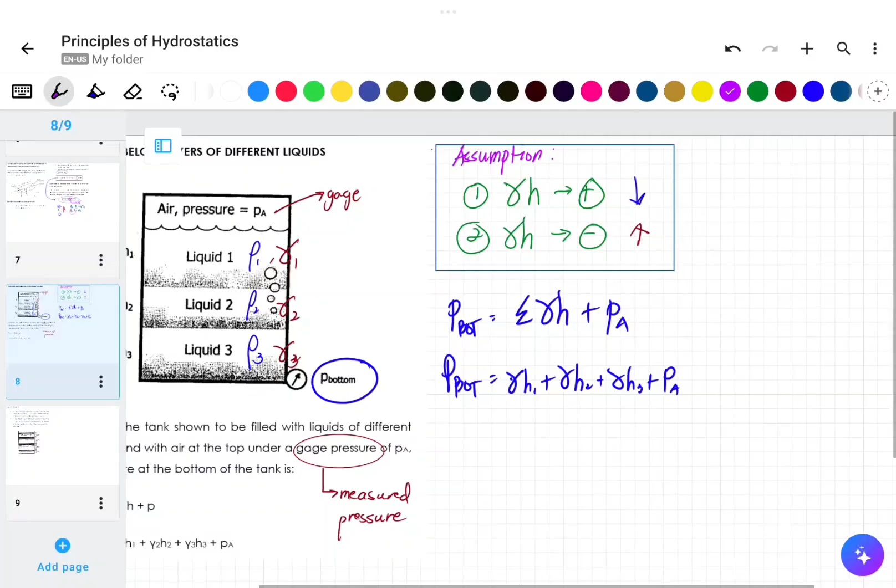Ngayon, dahil pabaliktad yung basa natin at mukhang we are dealing with the positive value nito, pagbabaliktad rin natin yung sign convention ng ating H, kasi binabasa natin siya in a positive value, not negative. Kaya, ito yung assumption natin: ang gamma H is positive kapag binasa mo pababa, at gamma H is negative kapag binasa mo siya pataas. Yung H kasi yung gamma hindi naman nagpapalit ng sign, that's a constant value for a liquid. Yung H yung nababago yung sign.

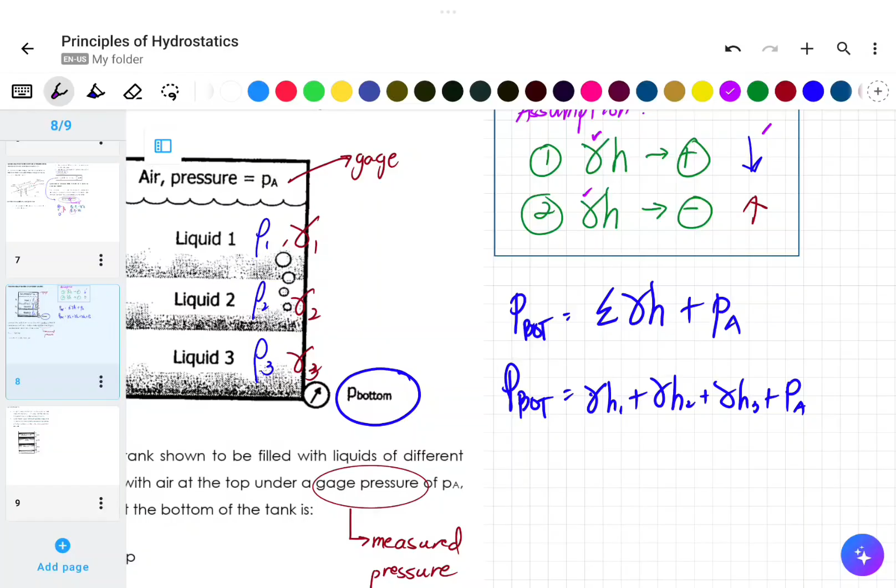Depende sa assumption natin, kung gusto niya pagbaliktad wala namang problema. But take note, kapag ganon ang ginawa mo, you have to make sure na pabaliktad din yung basa mo sa mga values ng gauge pressure sa bottom and the top kung saan mo babasahin katulad nito. Kung yan yung concern mo, pabaliktad. Kung ang positive pataas mo, dapat ito is a negative value. Bakit? Kasi dapat yung summation ng pressure mo, i-minus mo yung kung saan ka kumukuha ng pressure, that should be equal to 0 kasi by equilibrium.

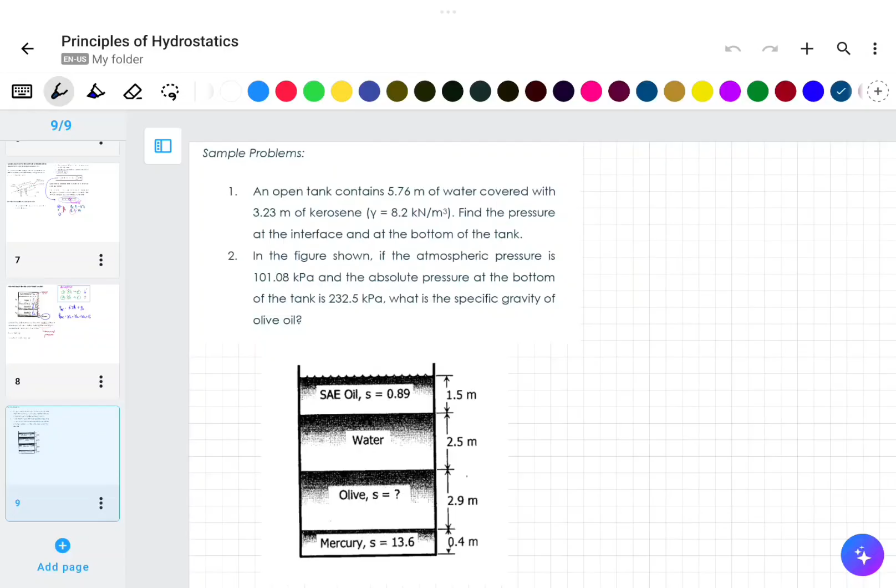Okay, so for us to understand that, sagutan natin itong dalawang sample problem na ito. Umpisa natin sa number 1. An open tank contains 5.76 meters of water and covered with 3.23 meter of kerosene na merong unit weight na equal sa 8.2 kilonewton per cubic meter. Ang tanong sa atin is, find the pressure at the interface and at the bottom of the tank. Yan, sa atin, sample problem number 1.

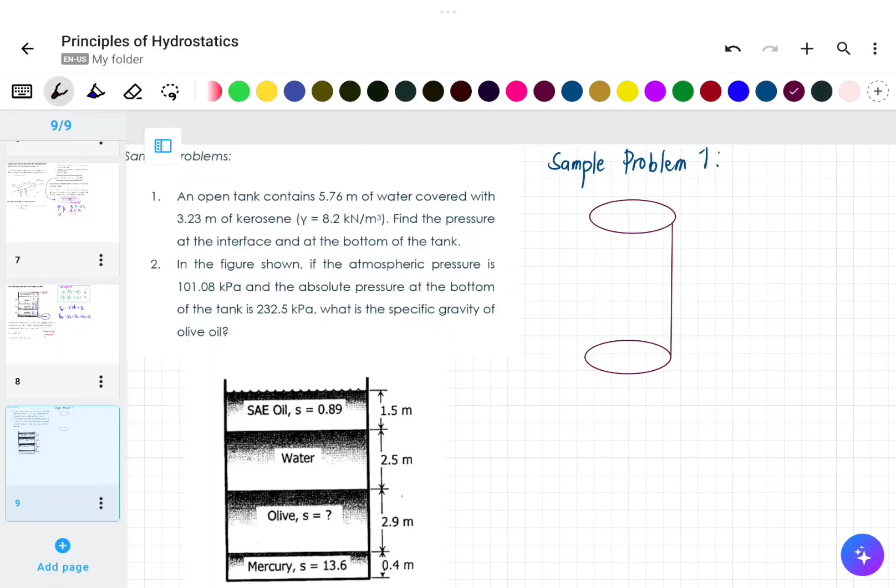Ano daw ang pressure sa interface at the bottom of the tank? So, dalawa. Hindi natin masasagutan to if wala tayong illustration. Umpisa muna natin. Open daw yung tank. So, let's say ito yung tank natin. Bawal yan yung tank, hindi ata gitna.

A tank contains 5.76 meters of water covered with 3.23 meters of kerosene. So let's say ito yung ating tubig. Ganito siguro, taasan natin. Ito yung ating tubig, tapos covered daw siya ng 3.23 meters of kerosene. So ito, ito yung ating 5.76 meters of water and this is 3.23 meters of kerosene. Yung pula, ito yung ating kerosene, and yung blue, ito yung ating water.

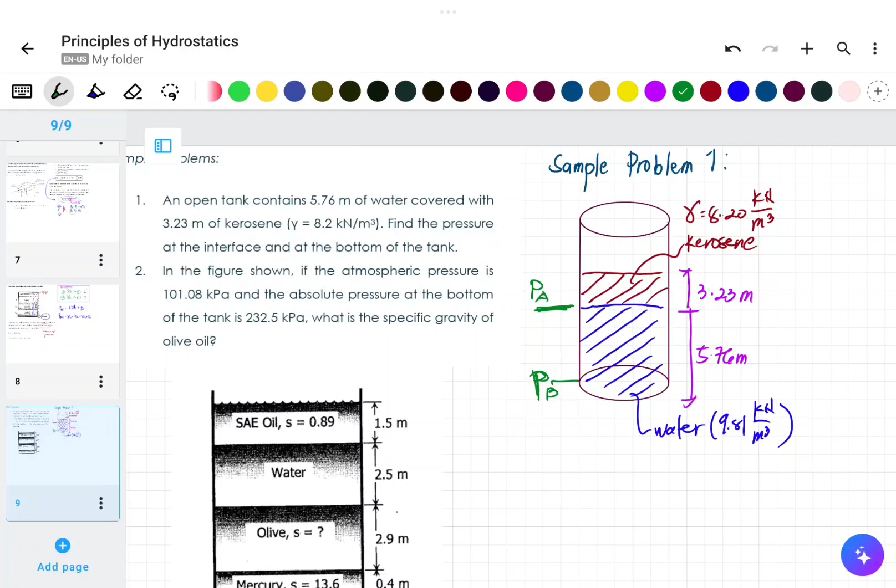Umpisa natin sa pressure at the interface, P sub A. P sub A is equal to gamma ng kerosene times the height ng kerosene. Yun lang, wala na. Open ba yung tank sa atmosphere? Open. So, that is P sub A is equal to 8.20 kilonewton per cubic meter multiplied by height h na 3.23 meters. It will give us a value na 26.486 kilonewton per square meter or kilopascal. So, that is the pressure at the interface.

Ngayon, ano naman daw ang pressure sa bottom ng tank? Pressure sa bottom ng tank is gamma H ng kerosene plus gamma H ng water. Meron na tayo nito ng kerosene, 26.486 kilonewton per square meter plus gamma na lang ng water, 9.81 kilonewton per cubic meter multiplied by the height na 5.76.

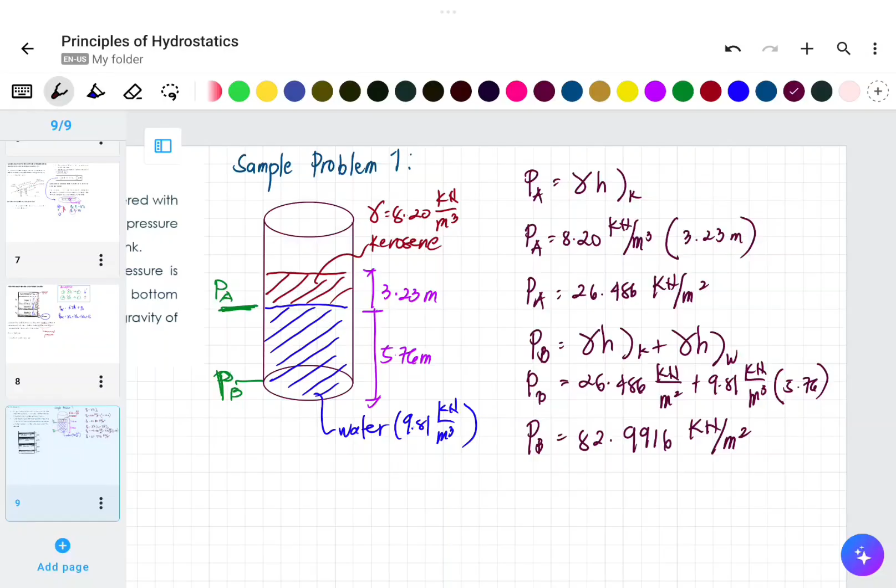So, ang pressure natin sa bottom is 82.9916 kilonewton per square meter, or kung gusto nyo i-round off depende sa instruction, or kung kilopascal o pascal. So that is for sample problem number 1.

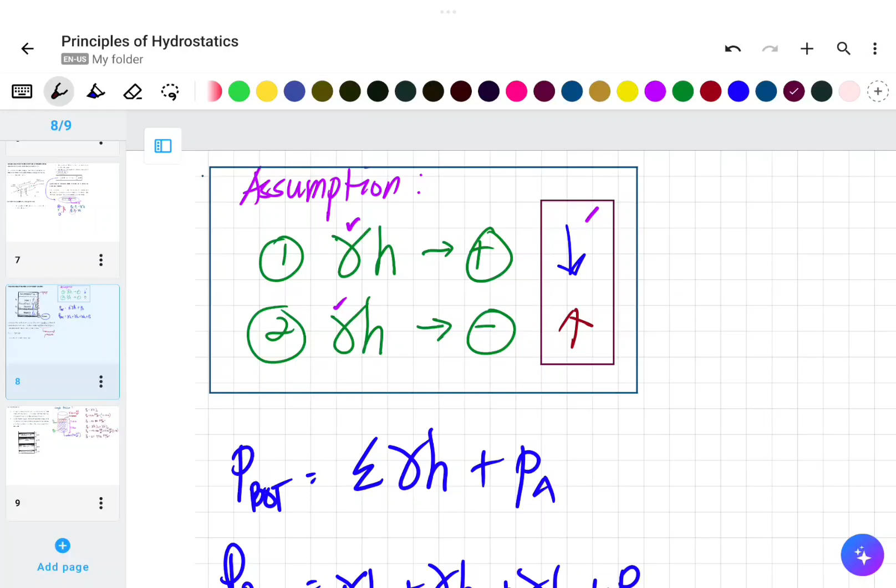Siyempre, mas mataas kapag nasa ilalim, mas mataas yung height difference. Take note na yung height difference dito, depende sa assumption na gusto natin. Kapag gusto nating positive, in-assume natin na pababa ang basa, positive value. Pwede rin naman to negative. Yun nga lang, that assumption or sign conveys na iba yung direction ng flow na pagbabasa mo ng height. Kung ang gusto mong basa ng height ay pababa, positive, okay lang. Kung gusto mong pataas, negative, okay lang din. That sign indicates yung direction lang ng inyong pagbabasa. Okay, that's it for sample problem number 1.

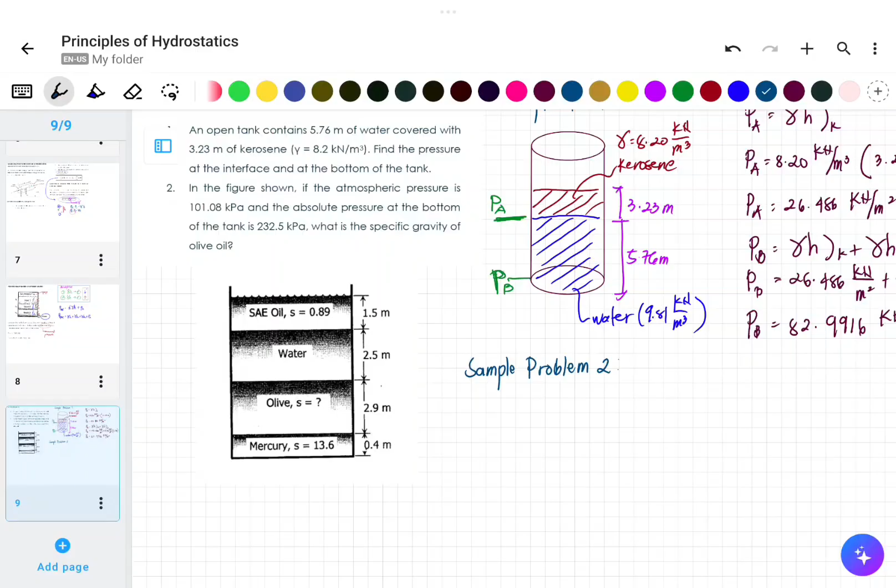So now let's proceed with sample problem number 2. Sabi dito, in the figure shown, nakikita nyo sa baba, no? The absolute pressure at the bottom of the tank, if the atmospheric pressure is 101.08 kilopascal and the absolute pressure at the bottom of the tank is 232.5 kilopascal, what is the specific gravity of olive oil? O yun yung sinabi, ano daw?

May binigay eh, so isa-isahin muna natin. Atmospheric pressure, kung binigay ng atmospheric, malamang meron tong gauge. So 101.08 kilopascal. Ang sabi, yung pressure daw at the bottom, eto, let's say ito yun. Yung pressure at the bottom is 232.5 kilopascal, absolute.

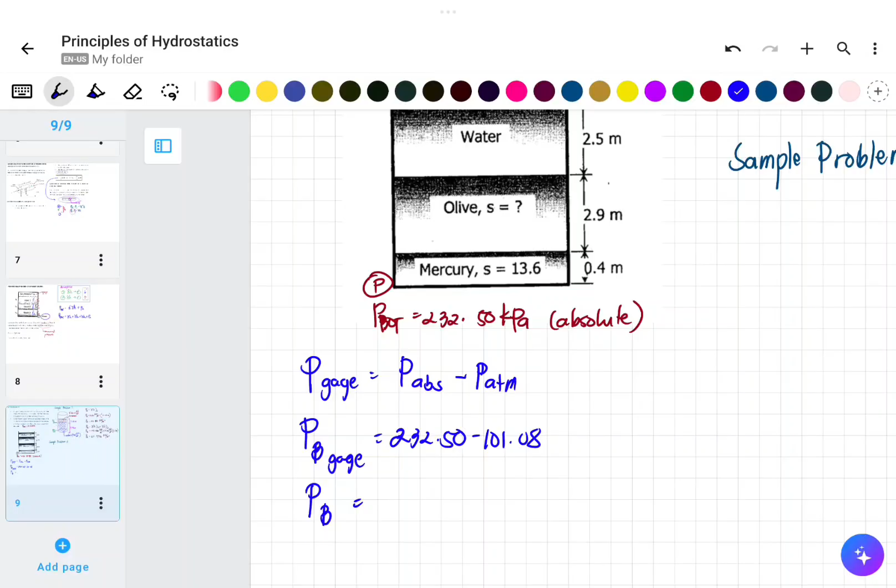Kung absolute yan, dapat maging gauge pressure yan. Paano? So P gauge para sa bottom, that is P absolute minus P atmospheric, dahil alam natin that P absolute is gauge plus atmospheric pressure. So P ng bottom na dapat ay gauge, that's equal to 232.5 minus 101.08, given, and alam natin na unit yan kilopascal, so that is equal to 131.42 kilopascal. Take note, this is a gauge pressure, tandaan ha, gauge pressure dapat.

So kung gauge pressure, tinatanong naman sa atin sa problem ay, ano daw tong specific gravity ng olive oil? Ano daw yung olive oil na yan, na specific gravity? Okay, para makompute natin yan, gamitan natin ng summation ng gamma H.

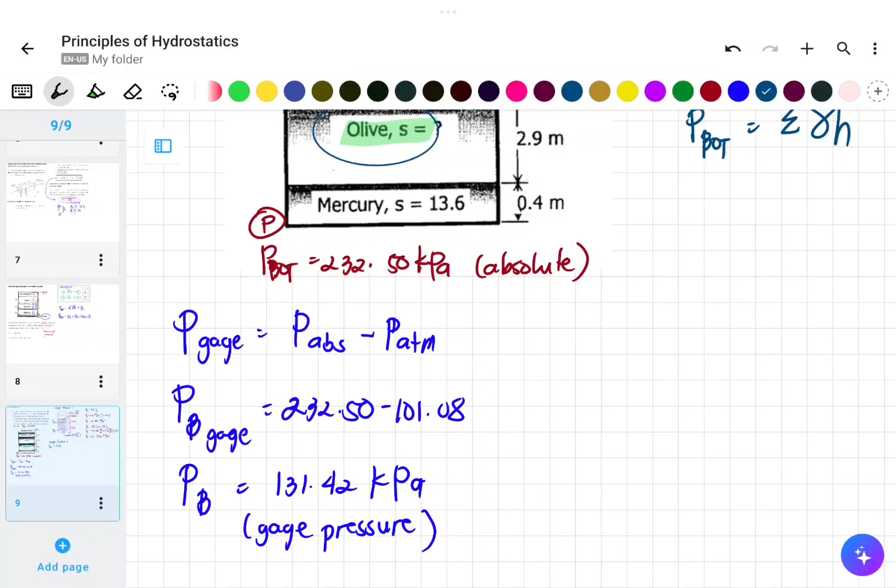Ngayon, may pressure ba sa taas? Wala, no? So dito sa taas, wala, ang pressure dito ay 0. Wala tayong binigay sa problem. So pagsasama-samahin lang natin, ang kailangan lang natin is pressure at the bottom of the tank, that is summation ng gamma H. Anong ulit daw yun? Gauge pressure, 131.42 kilopascal, so 131.42 kilonewton per square meter, kilopascal, no?

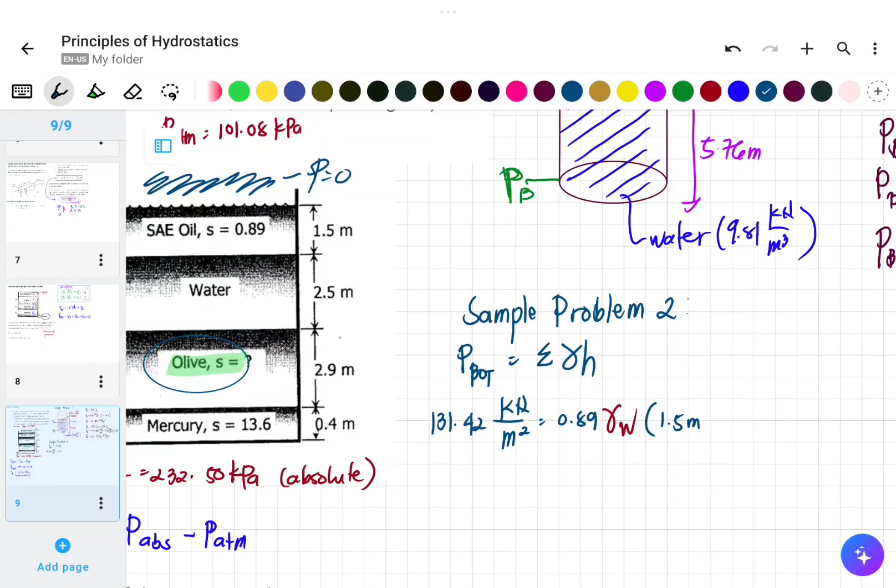Is equal to gamma H ng SAE oil. Binigyan tayo ng mga specific gravity, so kung para makuha natin ang gamma, i-multiply natin yung specific gravity. 0.89 times gamma ng water, multiplied by height. Ano yung height natin? 1.5 meters. Plus water, meron siyang specific gravity, gamma ng water, multiplied by 2.5 meters.

Then ano pa sunod? Plus, ito hindi natin alam, yun yung S. Gawin natin medyo matingkad na kulay. S times gamma ng water, multiplied by ano yung height ng olive oil? 2.9 meters. Then plus, 13.6 sa mercury, multiplied by gamma ng water. Ano yung height niyan? 0.4 meter.

Okay so ano nga ulit to? So lagay natin, so this is for ating SAE oil. Ito naman, ito yung ating water. This part is the olive oil. And this is for the, so ito yung ating mercury.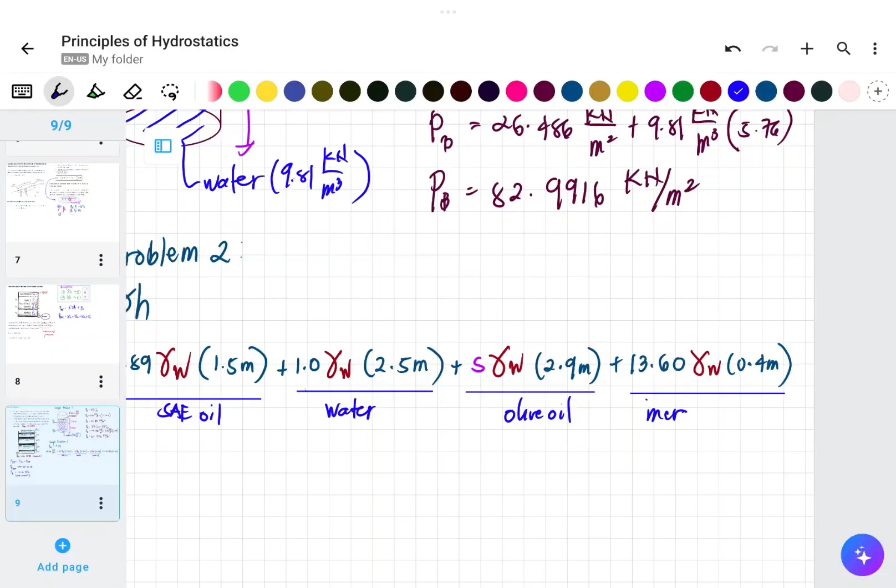So since lahat sila merong gamma ng water, pwede natin may factor out yan. So lalabas, pwede natin gawin is divide natin lahat ng gamma ng water. So this is 131.42 kilonewton per square meter over gamma ng water na 9.81 kilonewton per cubic meter, is equal siya sa pagsamasamahin na natin 0.89 times 1.5 meters plus 1.0 times 2.5 meters plus S times 2.9 meters plus 13.6 times 0.4 meters. So pag simplify natin to, 131.42 divided by 9.

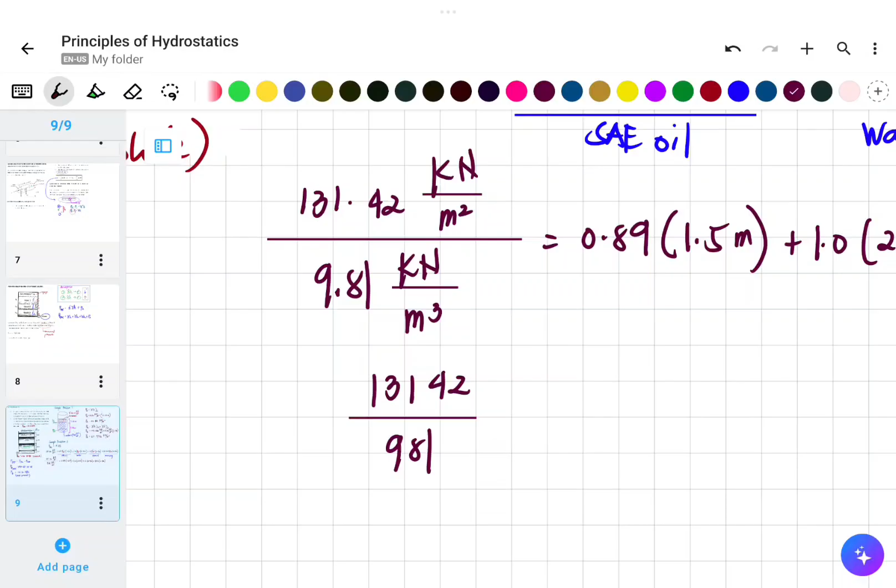So yan yung ating kalalabasan, no? At naka-fraction form to, so iusod lang natin, magiging anong unit ba nito? Meter na lang, no? Gawin natin yung fraction form dito, this is 13142 over 981 meters, kasi maka-cancel out yun, is equal to, pagsamasamahin lang muna natin yung mga may known value. 0.89 times 1.5 plus 2.5 plus 13.6 times 0.4.

That is 9.275 plus 2.9 S. Yan, so yung S value natin, pag sinimplify natin to further, lalabas yan na yung ating fraction dito na 13142 over 981 minus 9.275, divide natin sa 2.9 is equal to

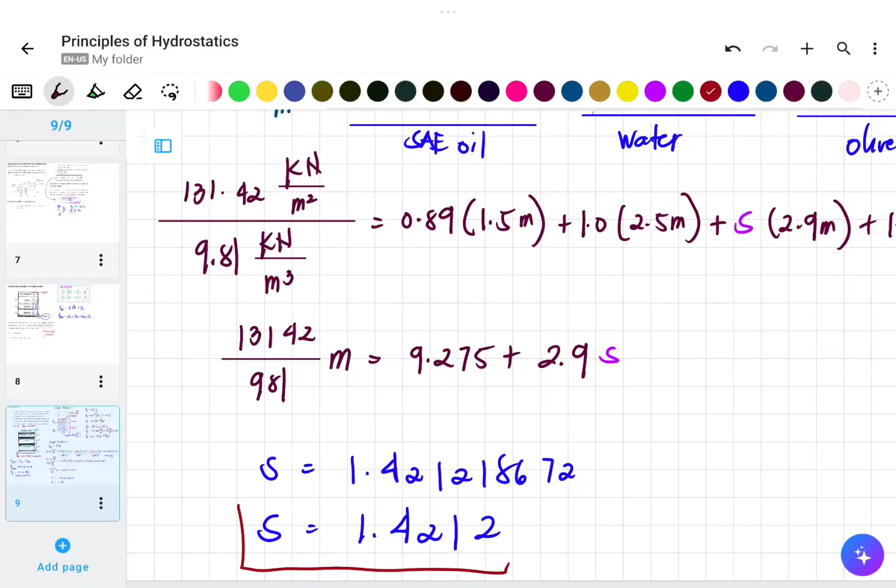1.421218672 and so on. So yung ating specific gravity, kung 3 decimal places siya, no? 1.4212, or for example, 3 decimal places, or 4 decimal places rather. Ayan na, so that's it for our specific gravity ng olive oil.

So that's for our first part of our discussion regarding principles of hydrostatics.